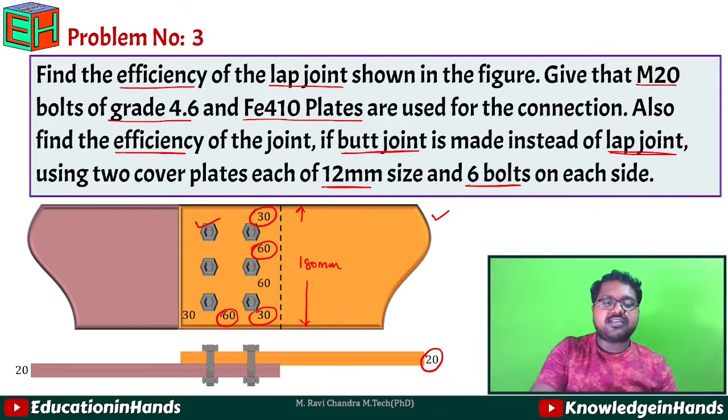First we write down the given data. For the bolt, it is M20 bolt of grade 4.6, meaning diameter D equals 20 mm. So diameter of hole D0 will equal D plus clearance. From table 19 we get the standard clearance of 2 mm. So 20 plus 2 equals 22 mm D0.

Grade 4.6 means FUB, the ultimate strength of bolt, equals 400 Newton per mm square, and FYB equals 240 Newton per mm square.

For this D, the cross sectional area of the shank ASB equals pi by 4 D square, which is 20 square, giving 314.16 mm square. Net area of the bolt ANB equals 0.78 ASB, which equals 245.04 mm square.

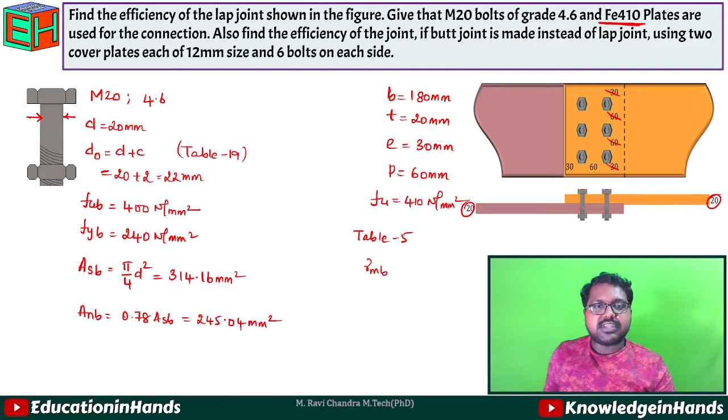At last, this connection is a bearing type connection, so from table 5 we need to take the value of gamma MB, which is 1.25. This is our given data required for the calculation in the problem.

So first we need to calculate the efficiency of the joint. Efficiency of the joint can be calculated using the formula: eta equals strength of bolted joint divided by strength of solid plate, into 100, which is VdB by TdG.

Here VdB, the strength of bolted joint, we get by calculating the values of VDSB, the design strength of bolt in shear, VDPB, the design strength of bolt in bearing, and TDB, the design strength of bolt in tension, and TDN, the design strength of plate, and then the combined effect of shear and tension.

So we need to verify all these 5 criteria. Out of these 5, whichever is minimum, we will take it as VDB.

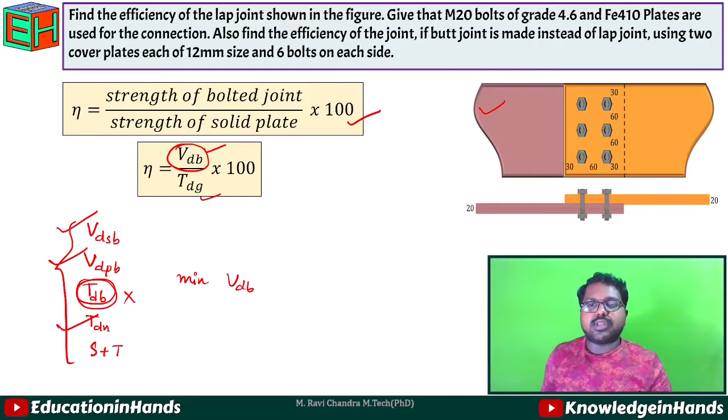In this connection, since it is a simple lap joint, there is no action of tension on the bolts, so we need to calculate just VDSB and VDPB. There is no need to calculate TDB. We also need to calculate the strength of plate, TDN. Since there is no tension on the bolt, there is no need to calculate the combined effect either.

So now we need to calculate VDSB, VDPB and TDN. Out of these 3, the minimum will be taken as VDB, the strength of bolted joint. So first we will calculate the shear capacity of the bolt.

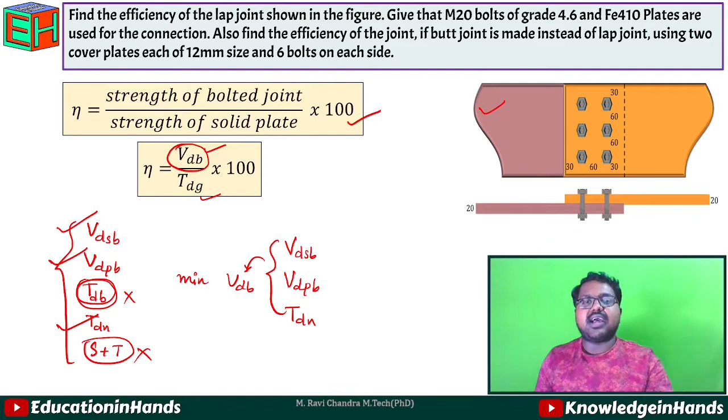Design shear capacity VDSB will equal VNSB by gamma MB, where VNSB is the nominal shear capacity of the bolt, equal to FUB by root 3, into NN ANB plus NS ASB, into reduction factors.

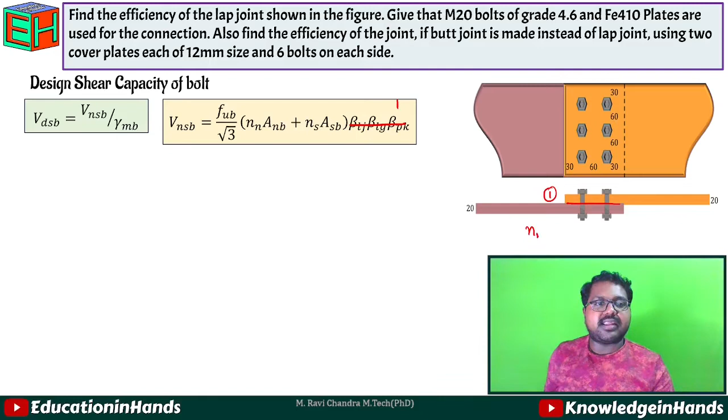So here there are no reductions, so we will take these reduction factors as unity. And then here 2 plates are connected together, so we are having only one shear plane. That one shear plane we will take it in NN. So NS into ASB will be equal to 0.

So VDSB, the design shear capacity of bolt, will be equal to FUB by root 3 into gamma MB into NN into ANB, which will be equal to 400 by root 3 into 1.25 into 1, that is one shear plane. Then net area of the bolt, that is 245.04. So if we calculate it, we will get the value of VDSB as 45.27 kilonewtons.

So this is the strength for single bolt, but here in this joint we are having 6 bolts. So VDSB, design strength of 6 bolts, will be equal to 45.27 into 6. This is the design shear capacity of 6 bolts, which is equal to 271.62 kilonewtons. So this is the design strength or design shear capacity of 6 bolts in shear.

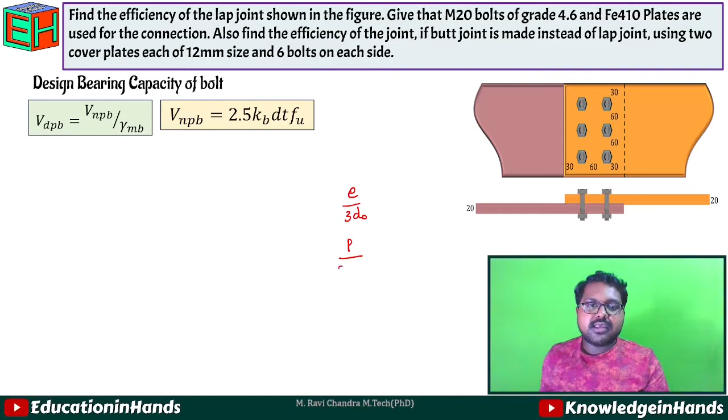Then next we need to calculate the design bearing capacity, which is VDPB, that will be equal to VNPB by gamma MB. So VNPB is nothing but 2.5 kb dt Fu. So here kb, if we calculate the value of kb, it is the smaller of E by 3d naught, or P by 3d naught minus 0.25, or FUB by FU, or 1.0. So if we calculate these 4 values, minimum of these 4 will be taken as the value of kb.

So here E by 3d naught, where end distance is 30, so 30 by 3 into d naught is 22, we will get the value as 0.45. And P by 3d naught minus 0.25, pitch distance is 60, so 60 by 3 into 22 minus 0.25, where we will get the value as 0.659. Then FUB by FU, 400 by 410, that will be equal to 0.97 and 1.

So out of this 4, 0.45, 0.659, 0.97 and 1.0, we will take the least value for KB, which is nothing but 0.45. So the value of VDPB will be equal to

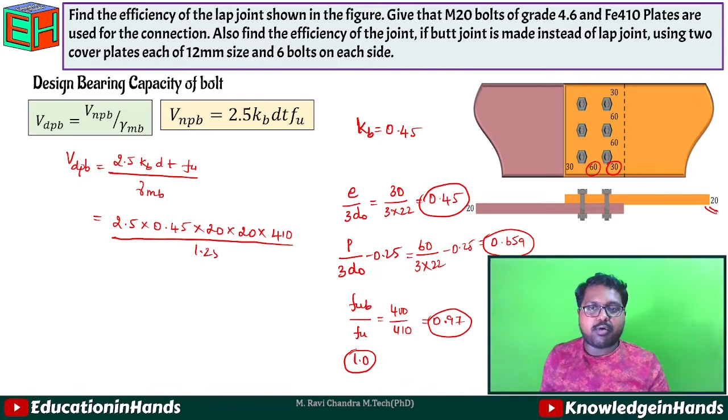2.5 KB dt Fu by gamma MB. So this is equal to 2.5 into KB, that is 0.45, into D, that is nothing but the diameter of bolt, which is 20, into T, thickness of the plate. So here thickness of the plate is 20 mm. So 20 into Fu, that is 410 by gamma MB, which is nothing but 1.25. So here we will get the value as

147.6 kilonewtons. So this is the design bearing capacity of bolt for a single bolt, but we need to calculate the design bearing capacity for 6 bolts. So VDPB for 6 bolts will be equal to 147.6 into 6. So that will be equal to 885.6 kilonewtons. This is the value for VDPB of 6 bolts.

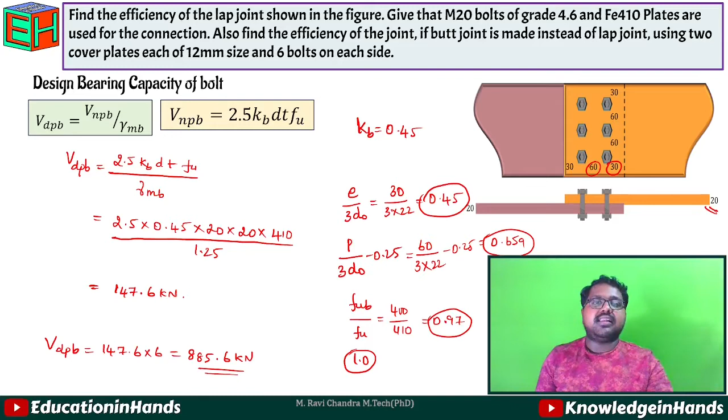Then next we need to calculate the design tensile strength of plate, which is nothing but TDN. So according to clause 6.3, TDN will be equal to 0.9 FU AN by gamma M1. So here we need to calculate AN. AN is nothing but net tensile area. So here if we take this cross section where bolts are present, here the net cross sectional area of the plate will be considered as AN.

So since it is a chain bolting, there is no need of sigma calculation with p square by 4g. We are just taking the plain formula where AN equal to B minus N d naught into T. So here width B is equal to 180 mm, minus N is the number of bolt holes. So for 3 bolts, 3 number of bolt holes are provided. So N equal to 3 into d naught, diameter of the bolt hole, that is 22, into thickness of the plate, that is 20. So we will get the value of AN equal to 2280 mm square.

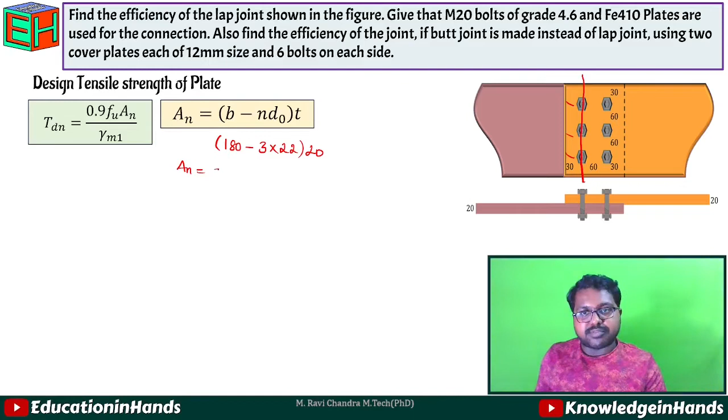So from this, if we calculate the value of TDN, which is equal to 0.9 into Fu, that is the ultimate strength of plate, 410, into AN 2280, and value of gamma M1, partial safety factor in ultimate strength, which is obtained from table 5 as 1.25. So we will get the value of TDN as 673.05 kilonewtons.

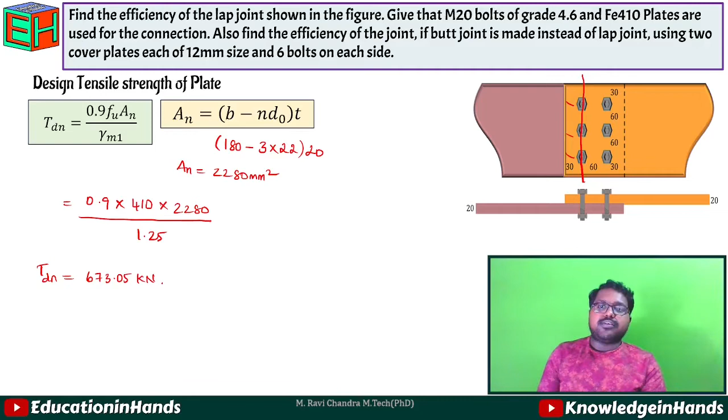So if we see these three values, VDSB equal to 271.62, VDPB equal to 885.6, TDN equal to 673.05. So out of these three failure criteria, minimum value will be taken for VDB. So this is the strength of joint.

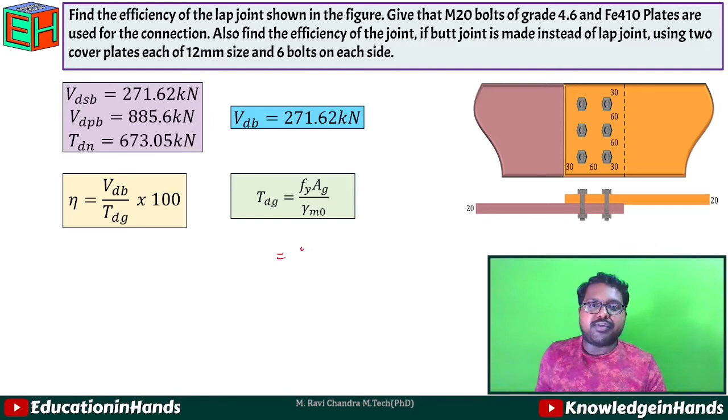Then to calculate the efficiency eta, VDB by TDG, which is nothing but the strength of solid plate, TDG, we need to calculate. So we will calculate this TDG from 6.2 clause of IS 800 as Fy Ag by gamma M naught. So Fy we know it, that is the yield strength of plate, which is equal to 250, into Ag is the gross area. So width of plate is 180 and thickness of plate is 20. We are not considering any holes here.

This is purely gross area. By gamma M naught, partial safety factor in case of yielding from table 5, we get this value as 1.10. So from this we will get the value of TDG as 818.18 kilonewtons. So these are the values of VDB and TDG.

So from this we will calculate the efficiency of the joint, which is nothing but 271.62 by 818.18 into 100, which is nothing but 33.19%. So this is the efficiency of the joint when lap joint is used.

But here they are asking to find the efficiency of the joint when a butt joint is made instead of a lap joint. So this is the lap joint, where we found the efficiency as 33.19. But they are also asking to find the efficiency of the butt joint, where it is a double cover butt joint with 12 mm cover plates used.

So if we see that, the butt joint will look like this. Here we are using 20 mm main plates with 12 mm cover plates, and the connection is the same but on both sides. Here 6 bolts are used, and for this one also 6 bolts are used. So for this we need to find the efficiency of the joint.

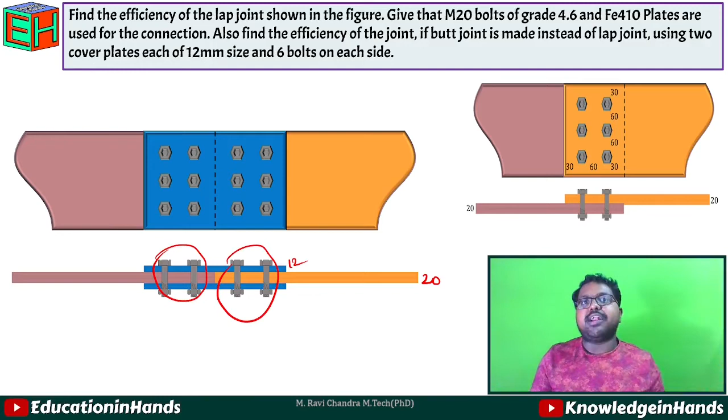So first we need to calculate the efficiency, meaning we need to find the strength of the joint, then the strength of the solid plate. So first, for the strength of joint, we need to calculate the design shear capacity, which is nothing but VDSB. So from VNSB by gamma MB we will get it.

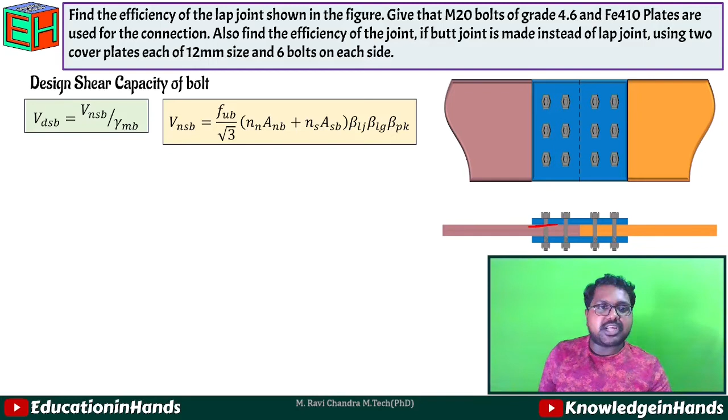If we see here the value of shear planes, where 3 plates are connecting, 2 shear planes are acting here. One is on the top cover plate and main plate, and another one is on the bottom cover plate and bottom main plate. So we need to take 2 shear planes, in NN itself. So VNSB is nothing but the nominal shear capacity of the bolt.

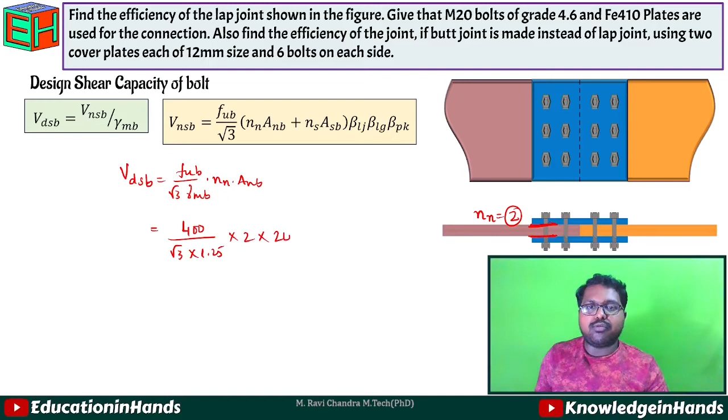If we calculate the design shear capacity, VDSB will be equal to FU by root 3 into gamma MB into NN ANB. This is FUB. So from here we get 400 by root 3 into 1.25 into 2, that is the number of shear planes, into 245.04. So we get the value of VDSB as 90.53 kilonewtons.

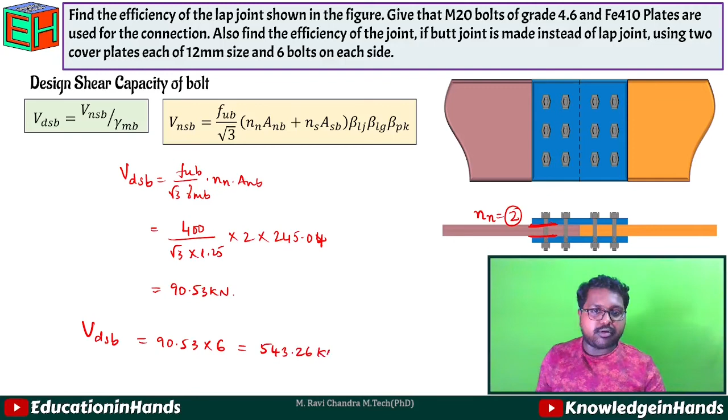This is for a single bolt, whereas VDSB for 6 bolts will be equal to 90.53 into 6, that is equal to 543.26 kilonewtons. Similarly, we need to find the value for design bearing capacity and design tension of the plate.

So here the design bearing capacity of the plate, where KB value is calculated as in the previous case, and if we see the T value, top plate is 12 mm and bottom plate is 12 mm. So total thickness of the cover plates combined is around 24 mm, and thickness of the main plate is 20 mm. So we need to take T as 20 only.

So if we calculate the value of VDPB, it comes same as the previous one, that is equal to 147.6 kilonewtons. So VDPB for 6 bolts will be equal to 885.6. And then if we see the design tensile strength of the plate, here also we are following the same approach.

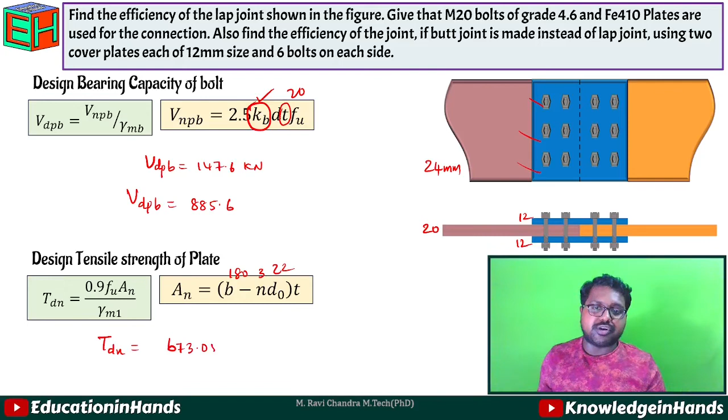B is 180 and N is the number of bolt holes, which is 3, and D0 is 22. So if we calculate the AN value, it comes same as previous. So we get the value of TDN same as previous, that is 673.05 kilonewtons. So if we see these three values, VDSB, VDPB and TDN, the least one will be taken for the strength of the joint.

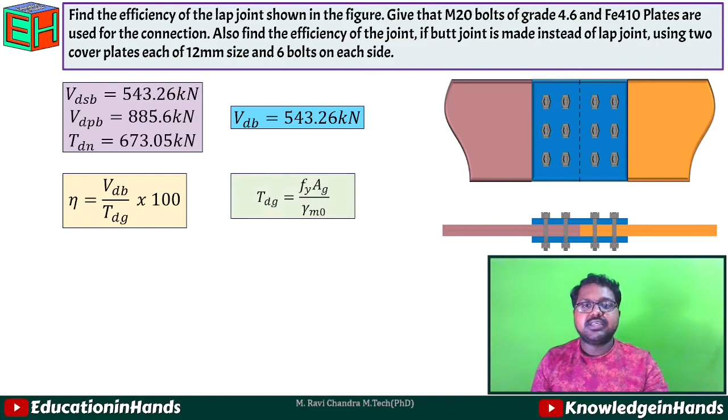So VDB equals 543.26. And then we need to calculate the value of efficiency, which is nothing but VDB by TDG. So TDG equals FY AG by gamma M naught, where TDG is also obtained in the same way, which is equal to 818.18 kilonewtons.

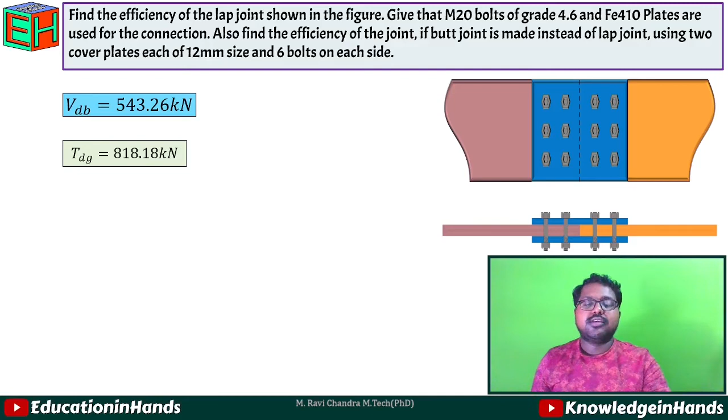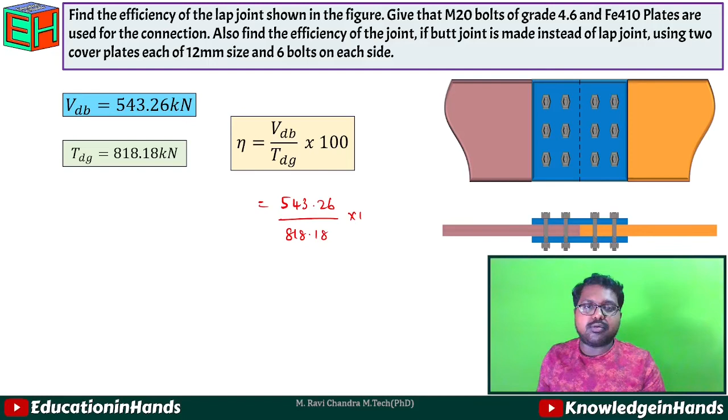So efficiency of the joint, eta, equals VDB by TDG into 100, that will be equal to 543.26 kilonewtons by 818.18 kilonewtons into 100, which is equal to 66.39%. So this is the efficiency of the joint when a butt joint, which is nothing but the double cover butt joint, is used for the connection.

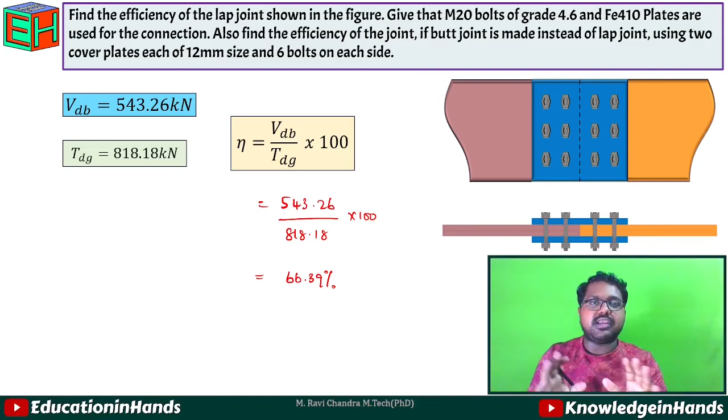So if we see overall, whenever this lap joint is used, we got the efficiency of the joint as 33.19%. But whenever we are using a double cover butt joint, the efficiency of the joint increased to 66.39%. So this is the difference between lap joint and butt joint for a single connection, where two types are used, and we calculated the efficiency of those joints. So this is for the efficiency problem.